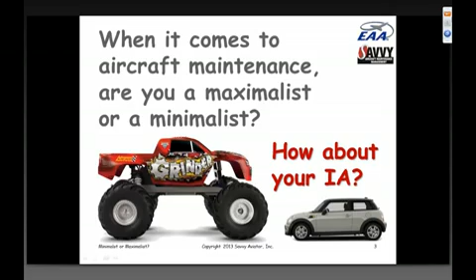It's important to decide which camp you're in, and it's even more important to figure out which camp your IA is in, because it will have a lot to do with how your aircraft is maintained.

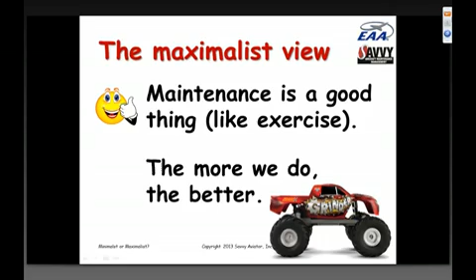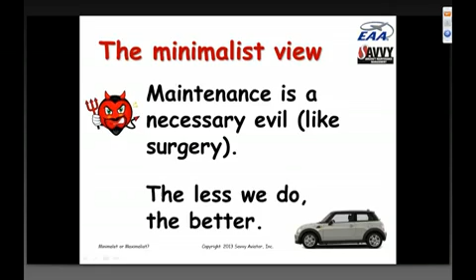To summarize these two competing philosophies very briefly: the maximalist view is that maintenance is a good thing, like exercise. The more of it we do, the better. The minimalist view is basically that maintenance is a necessary evil, like surgery. It's something we sometimes have to do, but the less of it we do, the better. And we should do it only when absolutely necessary, or when the benefits clearly outweigh the costs and risks.

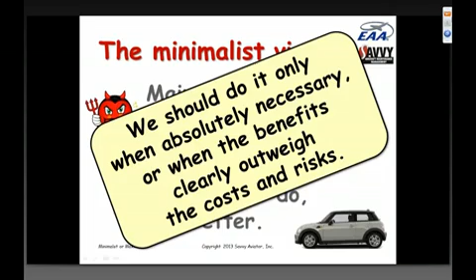And I fall into the minimalist camp. I'm an unabashed maintenance minimalist. Anybody who's read my Savvy Aviator column in Sport Aviation, or any of my articles and other publications, pretty well knows where I stand on this scale.

I believe strongly in doing only the maintenance necessary to make an aircraft safe, reliable, and compliant with regulations, and that doing any more maintenance than that is not only a waste of time and money, but it actually makes the aircraft less safe and less reliable.

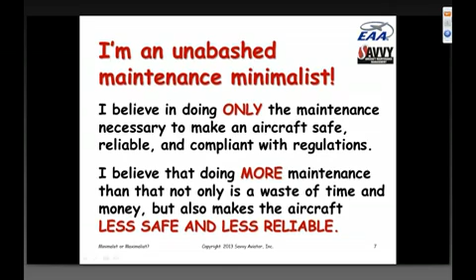And that's why I believe that maintenance is inherently a bad thing. It's something that we have to do, but we shouldn't be doing any more than absolutely necessary. And I'll illustrate that tonight with a whole bunch of war stories.

This less-is-more maintenance philosophy is one that served me very well for decades, originally as an aircraft owner, then later as a mechanic and a manager of maintenance for many, many hundreds of aircraft.

And it turns out that this minimalist philosophy has actually become an established science called reliability-centered maintenance. I've done webinars and articles on that subject. It is a philosophy that has been widely adopted throughout the aviation world by airlines, military, high-end biz jets, and actually has been adopted well beyond the aviation space in safety-critical industrial applications like nuclear power plants and offshore oil platforms and that sort of thing.

And pretty much the only part of aviation that still adheres to the maximalist philosophy is owner-flown general aviation. Owner-flown GA, as we'll talk about a little bit later, is something like 50 years behind the rest of aviation when it comes to how we maintain our aircraft.

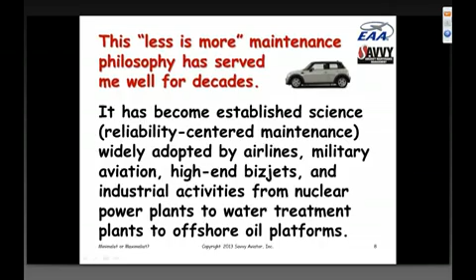And this minimalist philosophy, although it is universally adopted in other parts of aviation, is typically heresy to many general aviation mechanics, particularly the older ones, who were taught in A&P school that maintenance is a good thing and that more maintenance is a better thing.

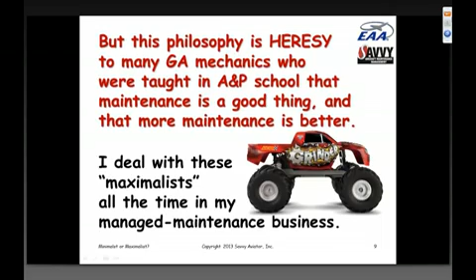And I have to deal with these maximalist mechanics and IAs all the time in my managed maintenance practice. And sometimes our debates get pretty interesting. I wanted to illustrate the perils of maximalism and why I believe in a minimalist philosophy by telling you a few stories about actual aircraft owners and some of the things they've gotten into.

Frank flies the heck out of this airplane. He literally commutes to work in it almost every day. He lives in Santa Barbara, and he is a marketing consultant that works with clients all over the United States, but a lot of his clients are up in Silicon Valley. So he's pretty well flown a groove from Santa Barbara up to the Bay Area and back, and he flies that trip a couple of times a week. He uses the airplane a great deal, and he absolutely depends on its reliability because effectively he uses it to commute to work.

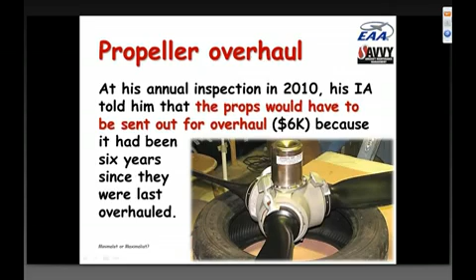Frank, up until very recently, used a very well-known twin Cessna specialty shop in Southern California, a shop that knows these airplanes very well. But the IA who runs that shop is an absolute maximalist, as we'll see. At his 2010 annual inspection, about 3 years ago, the IA told him that his props would have to be pulled off and sent out for overhaul.

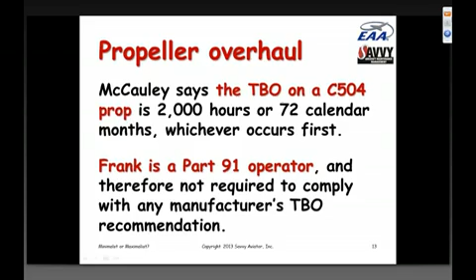At a cost of about $6,000, because it had been 6 years since they were last overhauled. These props are McCauley props, and McCauley says the TBO on these particular props, the C504s, is 2,000 hours or 72 calendar months, that's 6 years, whichever occurs first. But Frank is a Part 91 operator, like most of us, and he's not required to comply with any manufacturer's TBO recommendation. So this TBO from McCauley is really a mere suggestion for Frank, not a regulatory requirement.

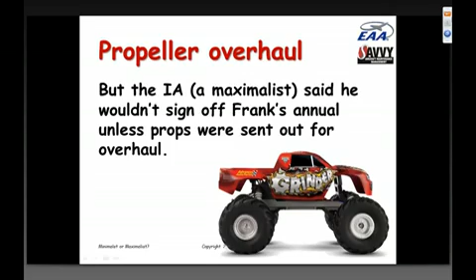Nevertheless, the IA, who is a maintenance maximalist, said he wouldn't sign off Frank's annual unless the props were sent out for overhaul. Frank consulted me, as he usually does. Sometimes he follows my advice, sometimes he doesn't, but he usually solicits it. So he asked me what I thought he ought to do.

I suggested to Frank that he not overhaul his props at 6 years because, first of all, the McCauley 6-year TBO, like all calendar time TBOs, is based on a worst case aircraft, typically an inactive aircraft parked outside in a high corrosion environment like South Florida. The 6-year TBO has been established because of concern about internal corrosion in the propeller hub. But Frank hangars his airplane, and he flies it several times a week. He is at much lower risk of corrosion because of those two things.

And there is no history of accidents caused by exceeding the 6-year limit. I read hundreds and hundreds of accident reports. I'm an information junkie, as probably most of you know. And frankly, I have never heard of a single accident caused by a high-time propeller coming apart in a piston aircraft engine. I have heard of accidents in turboprops, which have much more complicated propellers, but there's literally no history of accidents caused by not overhauling the props every 6 years. And in fact, I have similar props to Frank's, and mine haven't been overhauled in more than 20 years. So I practice what I preach.

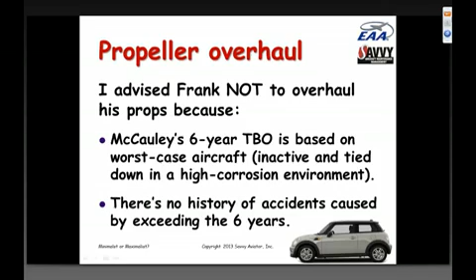In any case, I suggested to Frank that he go to his IA and try to make a deal with him. And he did. He asked the IA whether he would be willing to sign off the annual without removing the props if Frank promised that within 2 weeks after the annual was signed off, he would fly the airplane to a nearby propeller shop at San Luis Obispo Airport and have the propeller shop look at the props. If the prop shop said the props needed overhaul, he would overhaul them. If the prop shop said the props were okay to continue, then he wouldn't. The IA reluctantly agreed. Frank was a longtime customer, and against his better judgment, signed off the annual without doing the prop overhaul.

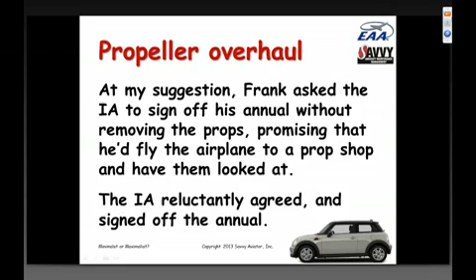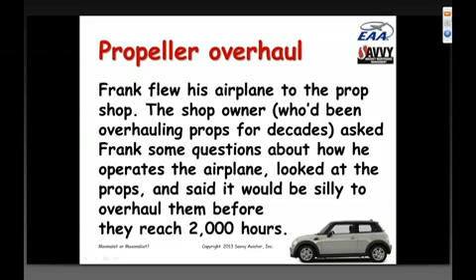Frank proceeded to fly his airplane to the prop shop. It's run by a shop owner who I have known for years and is a maintenance minimalist like me, and you don't find a lot of prop shop people who are minimalists. But this guy is very experienced, he's been overhauling props for decades. He looked at the props, asked Frank some questions about how he operated and stored the airplane, and concluded the exact same thing that I concluded: that it would be silly to overhaul the props before they reach 2,000 hours. So Frank didn't overhaul the props.

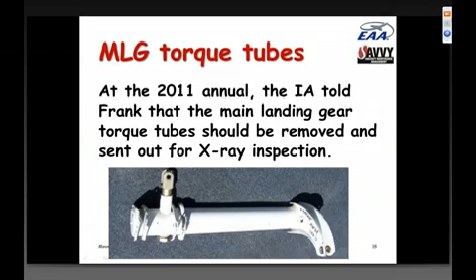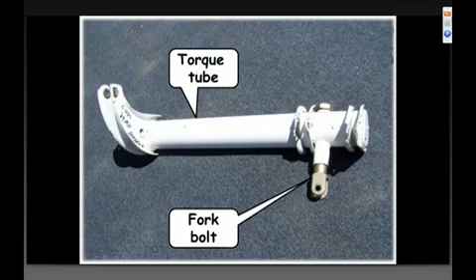Another thing that came up the next year, at the 2011 annual at this same Twin Cessna specialty shop in Southern California, is that the IA told Frank the main landing gear torque tubes should be removed and sent out for X-ray inspection. The torque tubes are part of the landing gear retraction mechanism in Twin Cessnas like Frank's. This is what they look like: a big steel welded complicated component with something called a fork bolt at one end, that operates the landing gear retraction system.

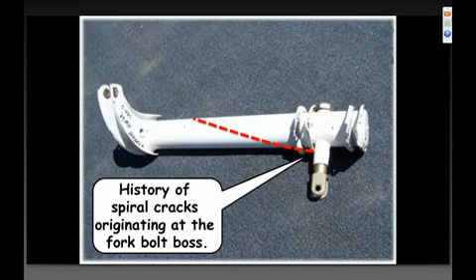These torque tubes have a history of developing cracks. The crack is a spiral crack. It always initiates at the fork bolt boss and progresses in a spiral fashion around the torque tube until eventually the torque tube fails, and during gear retraction it splits open, pretty much like a Pillsbury muffin can.

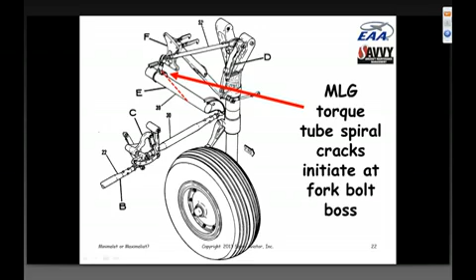There are lots of SDRs about these torque tubes cracking, and the IA was very insistent that these torque tubes be pulled off and sent out for X-ray inspection.

Frank consulted me. I advised him not to allow the IA to remove the torque tubes for X-ray testing because, first of all, in my experience, virtually no torque tube that goes out for X-ray testing ever passes the test. The vast majority of them flunk. So the act of removing the torque tubes and sending them out for testing is pretty much a guarantee that they'll be condemned. They're very expensive to replace.

I think they're $2,500 a piece, and there are 2 of them on the airplane. Most importantly, they always fail the same way, and the failure is a benign failure.

The way the torque tubes fail is that you retract the gear, the torque tube splits open like a Pillsbury muffin can. That particular landing gear remains down and locked. The pilot sees that one of his green lights hasn't gone out and that the red light doesn't go off. He puts the gear back down and lands.

To the best of my knowledge, there has never been a case of a gear collapse or any collateral damage caused by torque tube failure. When the torque tube fails, that particular main landing gear simply fails to retract.

No big deal. So my recommendation is to not go through this testing, which almost always results in having to buy new torque tubes, and do what literally every other Twin Cessna shop in the world does, which is simply to inspect the torque tubes visually for cracking, and not remove them from the airplane and not send them out for non-destructive testing.

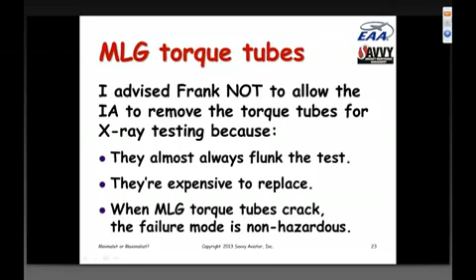Now, if the torque tube failure mode resulted in gear collapses or other damage or accidents or injuries or something like that, obviously I would feel very differently. But the point is that this is a failure whose consequences are benign, and in my view, there's no reason to be spending tons of money on non-destructive testing and replacing torque tubes.

Well, in any case, Frank listened to my arguments and decided to follow the IA's advice instead of my advice. So he had his 2 torque tubes removed and sent out for X-ray analysis. One of them came back red tagged by the shop. The other came back green tagged by the shop.

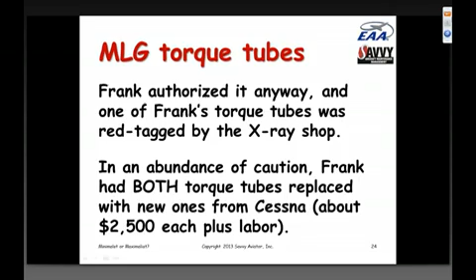In an abundance of caution, Frank decided to replace both of his torque tubes with new ones from Cessna, paid about $2,500 each for the new torque tubes, and, I don't know, 4 or 5 hours of labor for the removal and reinstallation and so on.

At the next annual, the 2012 annual, the IA discovered that these new torque tubes had been improperly manufactured by Cessna and had been rubbing against the wing ribs in the wing during gear retraction and damaging them.

Cessna fessed up to their error and supplied 2 additional torque tubes. So now Frank is on his 3rd set of torque tubes. Cessna provided the replacement torque tubes free in this case, but Frank once again paid for the labor for removal and reinstallation.

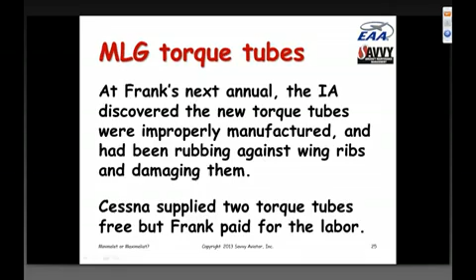Then at the 2012 annual, we had an interesting situation come up having to do with an airworthiness directive against the exhaust system of these airplanes. In the 1990s, and there's some history behind this, I was quite heavily involved in the development of this AD.

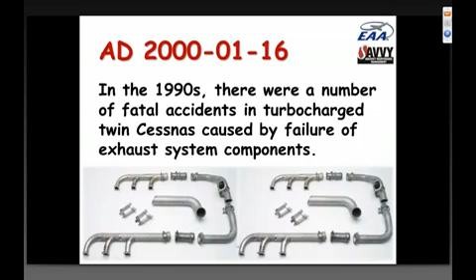In the 1990s, there were a number of fatal accidents in turbocharged twin Cessnas, like Frank's and mine, caused by the failure of exhaust system components. As a result of those accidents, the FAA issued an airworthiness directive, which I helped write, in January 2000, requiring, among other things, that exhaust systems with more than 2,500 hours time in service be replaced, overhauled, or recertified at the next engine overhaul.

I did miss one item here: during the development of the AD, we literally researched every single twin Cessna exhaust accident. What they had in common was that they were high-time exhaust systems with more than 5,000 hours on them, and many of them had been weld repaired in an incompetent fashion.

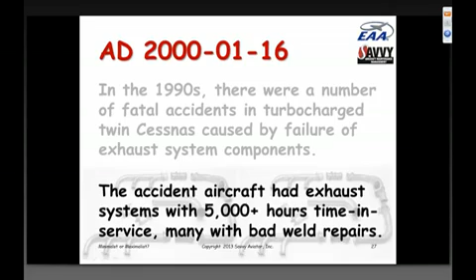The combination of high time and, in many cases, improper weld repairs were causing these exhaust systems to fail and causing accidents. So the FAA issued AD 2000-01-16 that called for exhaust systems with more than 2,500 hours on them to be replaced, overhauled, or recertified at the next time the engine was overhauled.

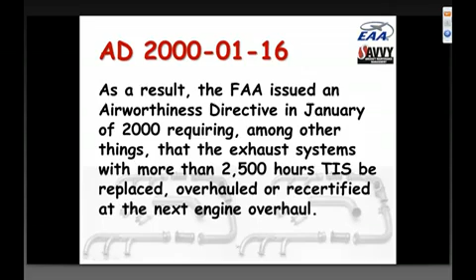The reason the AD was written that way was because the FAA was convinced by people like me that taking the exhaust system apart and putting it back together entailed a great deal of risk that it wouldn't go back together correctly, and that inspection should only be done when the exhaust system had to be removed anyway, which typically occurs when the engine is removed. So that's how the AD was written.

Here are the exact words in the AD having to do with the removal and recertification of the exhaust system. It provided an initial compliance time: at the next engine overhaul that occurs after the accumulation of 2,500 hours time in service since installing a new or overhauled exhaust system.

If the exhaust system did get recertified, which is very unlikely because a high time exhaust system probably wouldn't pass the test, just like the torque tubes—but in the event it passed recertification and went back on the airplane, which almost never happens, there was a repetitive compliance time saying it would have to be removed and recertified at intervals not to exceed 2,500 hours or 12 years, whichever comes first.

Note that the initial compliance time doesn't have a calendar time component, but the repetitive compliance time does have a calendar time component.

Well, Frank, being the very cautious guy that he is, when this AD was first issued back in 2000, decided in an abundance of caution to replace his exhaust system right then with new ones. It wasn't required by the AD, but Frank was aware of all the exhaust-related accidents in twin Cessnas caused by AD problems, and decided he'd sleep better at night if he replaced his exhaust system. So he put a brand new exhaust system on both engines in 2000.

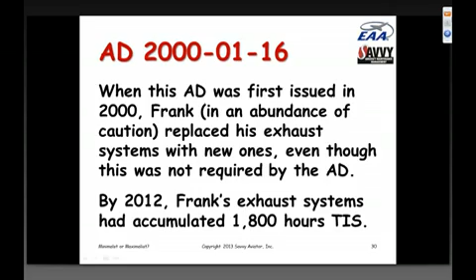By 2012, by the time he got to the annual, his exhaust system had accumulated 1,800 hours time in service, so it was still relatively young. But at that annual, the IA at this shop told Frank that the exhaust systems would have to be removed because they were now 12 years old.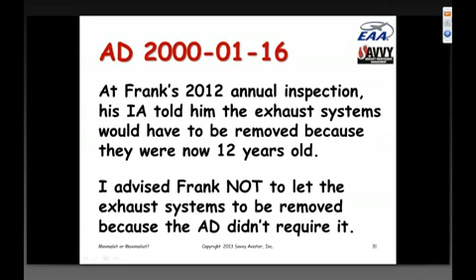Frank called me. I advised Frank not to let the exhaust system be removed because the AD didn't require it. He hadn't reached 2,500 hours, and even if he had, the AD didn't require the exhaust system to be removed until the engine was removed. I had Frank pull up the AD and read the wording for himself. He concluded that my interpretation of the AD was right and the IA's was wrong.

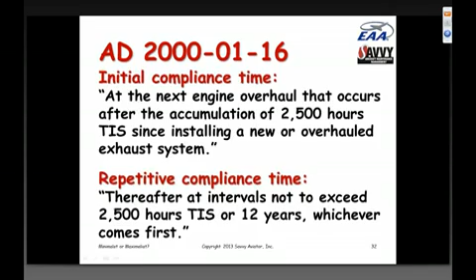But the IA insisted he was right and went ahead and removed Frank's exhaust system anyway. Frank got upset and decided to escalate the matter. He called the owner of the shop, who decided to call the Wichita Aircraft Certification Office of the FAA.

The Wichita ACO was the office responsible for this AD. They took it under advisement, and two days later came back and said they agreed with my interpretation, not the IA's, and that the removal was not required.

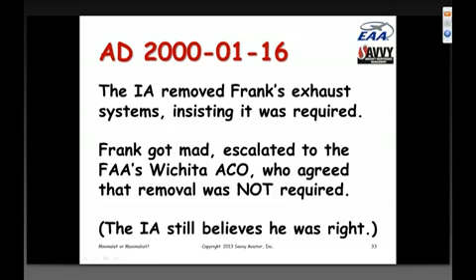The IA still believes he was right. He's still removing exhaust systems at 12 years, but the FAA itself said it wasn't required. Frank wound up getting his money back, getting the shop to refund the money they'd spent removing his exhaust system unnecessarily.

By now, Frank has learned his lesson, and he's stopped using that shop. He's now using a different shop in Southern California that has a much more reasonable maintenance philosophy, at least in my view.

I did a webinar that I'll just summarize very quickly about a disastrous Cirrus SR22 annual that we wound up bailing the owner out of trouble on.

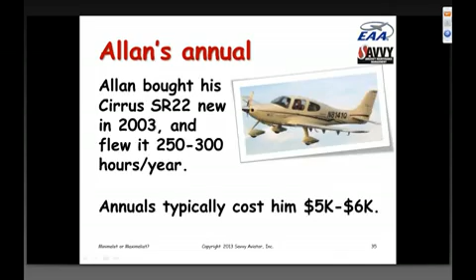He had bought his airplane new in 2003. This was another fellow who flew the airplane a lot. He used it to commute to work. He typically spent about $5,000 or $6,000 for his annual inspections. But in 2010, he decided to use a different service center, one he'd never used before, and that turned out to be a big mistake.

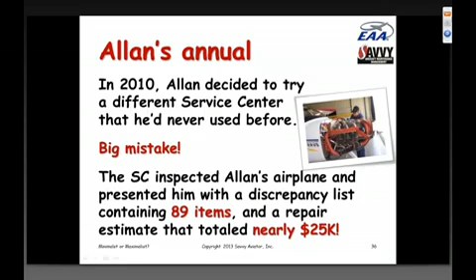That service center, who was obviously a maximalist service center, inspected Allan's airplane and presented him with a discrepancy list containing 89 items and a repair estimate that totaled nearly $25,000. Allan freaked out and called me. He was actually in India at the time on a business trip when he got this $25,000 estimate.

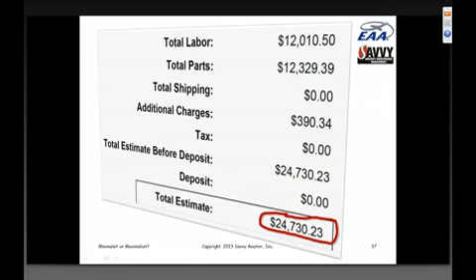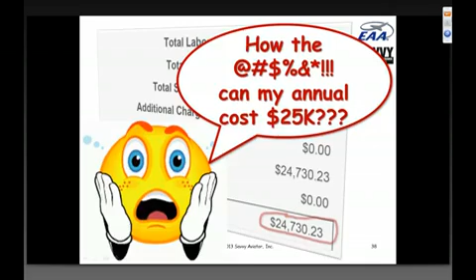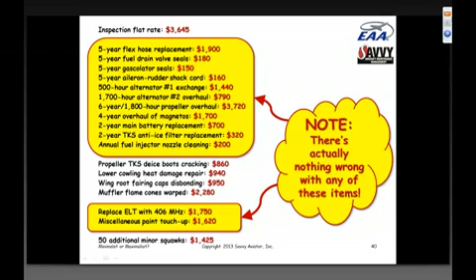Almost all of them are time-directed items — replacing hoses at 5 years, drain seals at 5 years, alternators at 500 hours, and that sort of stuff. That's really where most of the money was in this big estimate — replacing things. A 6-year propeller overhaul, a 4-year overhaul of magnetos, a 2-year battery replacement, so on and so forth. All things where we're replacing an item that is working just fine. There's no inspection finding that the item has a problem. It's simply that it reached some particular age, in calendar time or hours, and the manufacturer recommended replacing or overhauling it at that point.

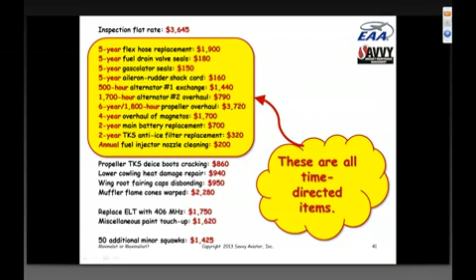We almost always recommend saying no to this sort of thing, and that's indeed what we did in this case. We went through this whole discrepancy list with a fine-tooth comb and recommended declining a whole bunch of items that we felt weren't required and weren't going to add any safety or reliability to the airplane. They were just checking off items on a checklist. We wound up reducing this invoice from almost $25,000 to about $8,000, which is still more than Alan was used to paying at an annual.

That was just a penalty for picking this particular shop, but it was about $17,000 less than the original estimate, because there was just a whole lot of stuff on there to say no to. It got a little testy for a while between us and the IA, but ultimately he came around, and we got this thing cut down to something reasonable.

Finally, I'd like to talk a little bit about top overhauls. Top overhauls are a pet peeve of mine. They're very, very common in my experience. They're almost never warranted, and we always recommend to our clients against doing top overhauls. The reason is simple: it never happens that you put an airplane in for an annual inspection and all of the cylinders on the engine are unairworthy. That just doesn't ever happen.

Typically what happens is you put your airplane in for an annual and 1, maybe 2 cylinders are unairworthy for some reason — they got a burned exhaust valve, the compression is below minimum and can't be brought up by the various methods we try to use to bring compressions back up. But it's never the case that all the cylinders are bad at the same time. It's just amazing how often mechanics recommend replacing all the cylinders just because 1 or maybe 2 have a problem. We always recommend against doing that, not only because it's wasteful to replace a cylinder that's still airworthy, but because it's very risky to do.

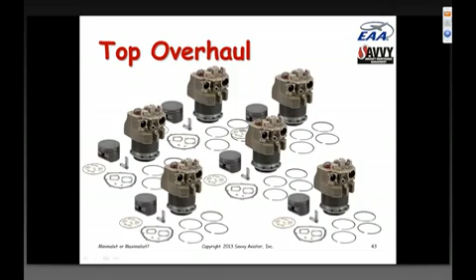The top overhaul is one of the riskiest maintenance operations you can do on an aircraft. Unfortunately, I've had the misfortune of serving as an expert witness on at least half a dozen lawsuits that arose out of air crashes caused by improperly executed top overhauls. So we always recommend against it because it's uncalled for, it's expensive, but most importantly, it might get you hurt.

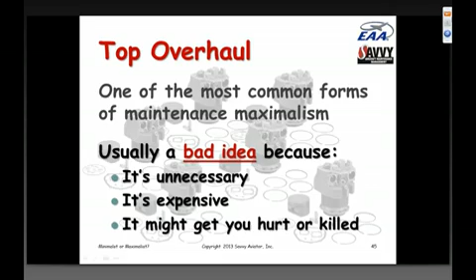I'll show you just a few pictures of some of the top overhaul lawsuits and accidents that I've gotten involved with one way or another over the last few years.

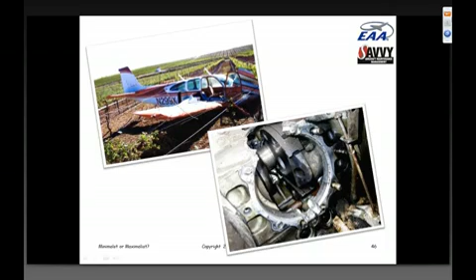A great deal of forensic work was done, as is typically the case with accidents like that which result in lawsuits. It turned out that a cylinder came off in flight because the mechanic who installed it used a small dab of sealant called TCM gasket maker. This is a very good sealant to use on lots of things, but no kind of sealant is allowed when installing a cylinder. Even a tiny bit of sealant on the cylinder base O-ring, where he applied it, will extrude onto the base flange, cause the hold down studs to lose their preload, and the studs will shear, causing the cylinder to come off. That's what brought this airplane down - just a tiny dab of sealant applied in the wrong place.

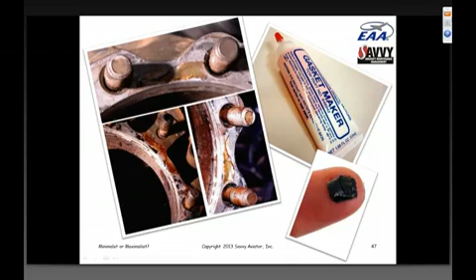It's a really big lawsuit. I think it was a $12 million lawsuit or something.

Here's another one I was involved in as an expert witness for Continental Motors. This was another very tragic accident involving an A36 Bonanza that took off out of Santa Monica with a doctor and his wife. It had a catastrophic engine failure not long after takeoff due to a thrown rod. The pilot attempted to turn back and land on the beach. He didn't make it, but he made an extremely good ditching, and when the aircraft was dragged up onto the beach, you can see the airframe was still in very good condition. Unfortunately, the pilot had not installed shoulder harnesses in the A36, and both he and his wife hit their heads during the ditching and were apparently knocked unconscious.

The airplane sank and they drowned. If they had shoulder harnesses, this accident would have been eminently survivable, but unfortunately they didn't.

When we looked at the history of this aircraft, the engine had undergone a top overhaul just a few hours before it came apart. The mechanic who did the top overhaul - let me just be charitable and say he had no business working on a piston engine. All his experience was with turbine stuff, and he screwed up the top overhaul. A bearing spun, and the number 2 connecting rod sheared and was thrown through the side of the case, and the engine came apart.

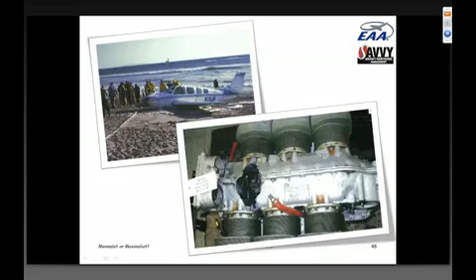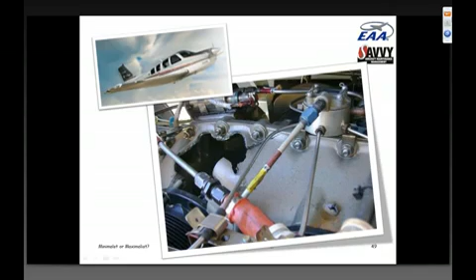Here's another similar one with a much happier ending. It was a B-36TC Bonanza belonging to a doctor on the East Coast, who had the engine throw a rod less than 10 hours after 3 cylinders - all the cylinders on one side of the engine - had been replaced improperly. He made a forced landing where he didn't bend any metal and didn't get hurt, but the engine came apart, and he was in a very mountainous area at the time. It was only his cool thinking and skill that prevented this from turning into a major tragedy.

Here's one of our own Cirrus clients that went in for an annual. The shop replaced 2 cylinders, which actually had to be replaced - they had burned exhaust valves - but apparently the mechanic got distracted and failed to torque down the screws holding the rocker covers on. So 10 or 15 hours later, on a dark, moonless night at 14,000 feet over the Florida Panhandle, this engine cratered. Our intrepid aviator, an aircraft owner and doctor, made a beautiful dead stick landing on a little airstrip in Marianna, Florida.

If you look at the pictures that were taken right after the accident, you can see that the left rocker cover is completely gone. There's no sign of either the rocker cover or the 5 hold-down screws. The right rocker cover is hanging by a single top screw, and the other 4 screws are missing.

So clearly the mechanic neglected to torque these screws down. Maybe he put them in finger tight, and then the Snap-on truck came by, or the phone rang or something. He got distracted. Kind of stuff happens all the time. And the rocker covers came off. The engine threw all of its oil overboard, and it wound up throwing a rod and cratering the engine.

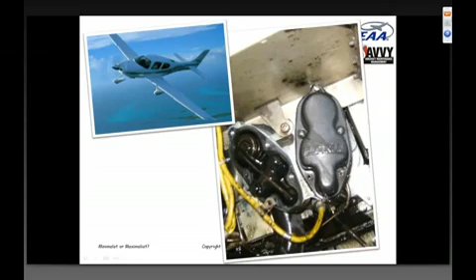I've just been involved in too many of these things, and so I'm very, very squeamish about multiple cylinder replacement at once, and particularly top overhauls. I always try to discourage my clients from doing top overhauls because of the risk and because there's really no compelling reason to do it.

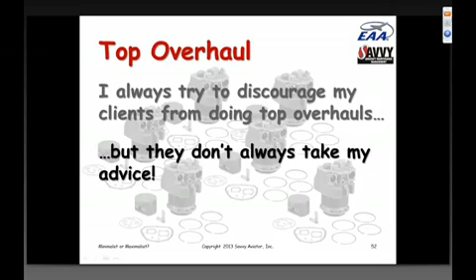But they don't always take my advice. And I'll be telling you a brief story later about a client, something that just came up in the last 2 weeks that I'll tell you about.

But in any case, I am an unabashed maintenance minimalist. I don't believe that more maintenance is better maintenance. Usually it's worse. My philosophy in maintaining my own airplane and in maintaining my clients' airplanes is to perform only the maintenance that clearly is either required by regulation or clearly contributes to making the aircraft safe or reliable. If it doesn't meet that test, we don't want to do it.

This is a lesson we learned many years ago. I wrote an article for EAA Sport Aviation a couple of years ago called The Waddington Effect, about a British scientist, Conrad Waddington.

C.H. Waddington, who got drafted into the Air Force during World War II. He's British, and he was assigned during the war to something called the Operations Research Section of the Royal Air Force Coastal Command, where they did research for the Air Force on all sorts of interesting projects. But the most interesting project, at least to me, that he was involved in had to do with trying to figure out how to improve the maintenance on the B-24 Liberator bomber fleet that the RAF Coastal Command was using to drop depth charges on German submarines.

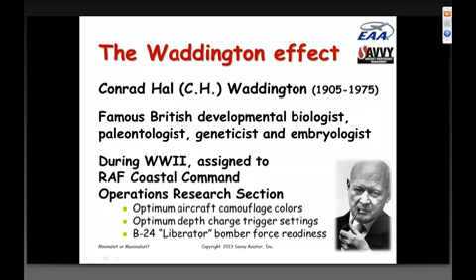And he discovered, as part of his research, an interesting phenomenon that became known as the Waddington Effect, where he plotted the number of unscheduled repairs, in other words, squawks, that came up on these airplanes as a function of how many hours it had been since they were in the shop last. At the time, these airplanes went into the shop every 50 hours for not only an oil change, but a whole bunch of other preventive maintenance.

What Waddington discovered in his research was that the more hours since the airplane had last been in the shop, the less frequently it broke. At no time did the rate of squawks start to increase until it was time to go back in the shop for the next preventive maintenance cycle. The number of squawks continually decreased over time until the airplane went back into the shop for its next 50 hour.

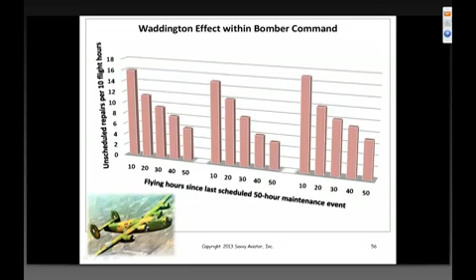His conclusion, which is pretty obvious when you look at the data this way, is that scheduled maintenance tends to increase breakdowns. This can only be because it's doing positive harm by disturbing a relatively satisfactory state of affairs. He pointed out that there was no sign that the rate of breakdown was starting to go back up after the 50 flying hours when the airplane went back into the shop for its next scheduled maintenance cycle.

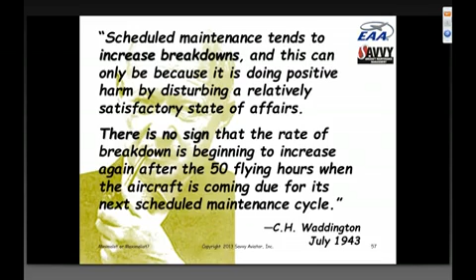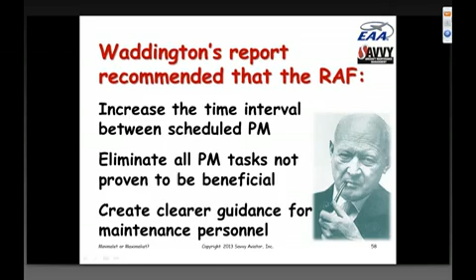As a result of this research, the Waddington's group recommended and the RAF adopted a new maintenance policy, which increased the time between scheduled preventive maintenance and eliminated a great number of the maintenance tasks that they had been doing, and only did those maintenance tasks that were absolutely proven to be beneficial. As a result of these changes, the number of effective flying hours, what we would call today force readiness of this B-24 fleet, increased by more than 60%. So the less maintenance they did on these airplanes, the more reliable they were.

This very same discovery, and all of the work that Waddington did was classified and didn't get unclassified until 1975.

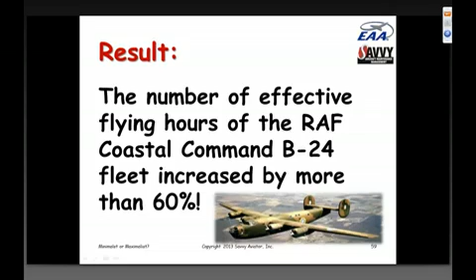But the airlines rediscovered this same thing in the 60s, that the less preventive maintenance they did, the more reliable the airplanes were and the less downtime they had. And they started drastically cutting back on maintenance.

The reason for this is simply that maintenance is, as I said, like surgery. It's inherently invasive, and anytime you do it, there's a chance a mechanic's going to screw something up. The more invasive the work, the more likely there's going to be a maintenance-induced failure, or mechanic-induced failure, if you like. There is nothing you can do to an airplane that's more invasive than doing a top overhaul.

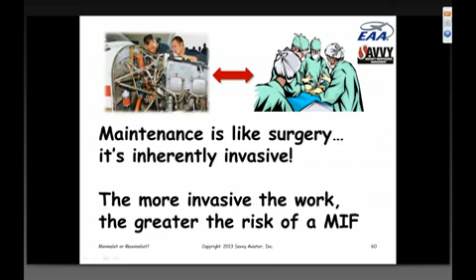As I said, this minimalist philosophy, which became known as reliability-centered maintenance, was adopted by all of the air carriers in the 1970s. There's a standard for reliability-centered maintenance that is maintained by the Air Transport Association. It's called the Maintenance Steering Group Number 3 Report, or MSG3 for short.

In the 80s, the philosophy was adopted by the military. In the 90s, it was adopted by all sorts of non-aviation industries that had similar maintenance-intensive, safety-critical kinds of activities.

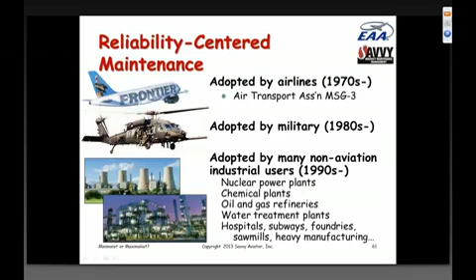So this is sort of the timeline of how maintenance philosophy has evolved until most of aviation is now doing things in this reliability-centered, minimalist way, where the focus is not on doing scheduled overhauls and life-limiting things to TBO and so on, and doing things on fixed timetables.

The emphasis is on doing very good condition monitoring and finding incipient failures before they become actual failures. So we emphasize inspection rather than time-directed tasks. And also a big part of RCM is doing what's called failure effects analysis, which is analyzing the consequences of the failure and not trying to prevent failures that have benign consequences.

That's the kind of thing we were talking about with Frank's torque tubes. Why get all hot and bothered about torque tube cracks when the crack typically can be found by simple visual inspection? But if the worst comes to the worst and the torque tube cracks, it's no big deal. The landing gear just doesn't retract. You put the gear down, you land the airplane, and you go fix it.

It's not a big deal. It's not going to hurt anybody. It's not going to cause collateral damage. So why get all hot and bothered about these cracks? Cracks in an exhaust system are very serious. Cracks in a landing gear torque tube are not serious. We have to be thinking about not only the failures, but what the consequences of the failures are.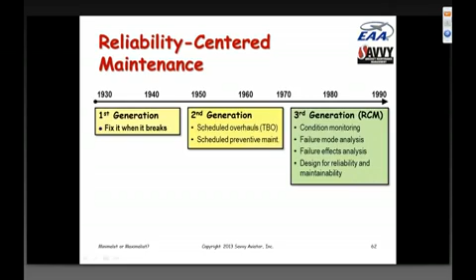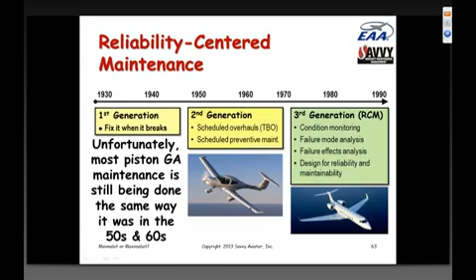And we should be focusing our maintenance dollars on trying to prevent failures that have serious consequences, and not trying to prevent failures whose consequences are acceptable. Unfortunately, most piston GA maintenance today is still being done using the second generation approach that dates back to the 50s. We're way behind the rest of aviation, and as a result, aircraft owners tend to do way too much maintenance, spend way too much money on maintenance, and incur way too many maintenance-induced failures that wouldn't happen if a more minimalist philosophy was used.

So let me wrap this thing up with one more war story, and this is one that just came up in the last couple of weeks. It involves a client of mine who has a 2002 Cirrus SR22. My company manages about 10% of the Cirrus aircraft in the U.S., so we have a lot of Cirrus war stories to talk about.

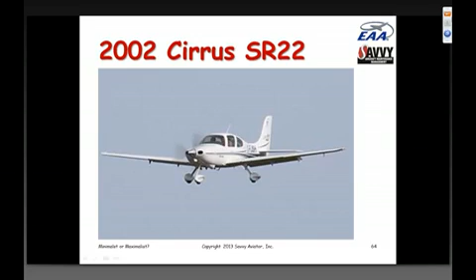The short version of the story is the owner decided he was going to sell this aircraft. He actually was buying a twin Cessna, and he wanted to sell his Cirrus SR22. So he listed the airplane with a broker, and then while the airplane was listed for sale, for some reason he had a compression test done. I'm not sure why he had the compression test done, because it wasn't time for his annual inspection.

But he had a shop do a compression test during an oil change or something, and one cylinder had compression below the master orifice threshold that Continental specifies as their airworthiness limit. The other 5 cylinders had mediocre compression, but they were all airworthy readings. I think one was in the high 40s and the others were in the 50s and 60s. But one cylinder tested low.

We recommended to the owner that he replace that one cylinder, but the owner decided to have a top overhaul done and replace all 6 cylinders. So he pulled all 6 cylinders and sent them to a very good cylinder shop that we recommended. The shop inspected the cylinders and advised the owner that none were repairable because they all had too many head cracks to overhaul. It just wasn't economical to repair them.

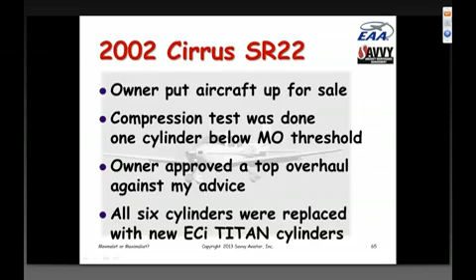So his 6 cylinders were retired. He wound up buying 6 brand new ECI Titan cylinders, put them on the engine, and shortly thereafter started complaining about an oil leak. He had the airplane in a couple of different shops looking for the source, and eventually, about 30 hours after the top overhaul, the source of the oil leak was found.

It turned out to be a crankcase crack at the aft side of the number 2 cylinder, at the 7th stud hole down, right between the number 2 cylinder and the oil cooler. So now he has a cracked crankcase. The engine is now trash and unairworthy, with 6 brand new cylinders on it with less than 30 hours on them.

So now the owner found himself facing replacing the engine with a factory rebuilt engine, 30 hours after spending something like $15,000 doing this top overhaul that we recommended he not do. He was not a very happy camper, obviously.

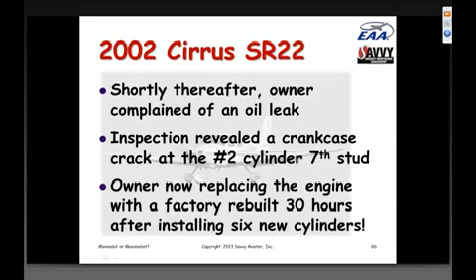We contacted Continental Motors on his behalf and negotiated a really good deal for him. First, Continental would give him full core credit for his engine even though it had a cracked crankcase, and second, they would let him keep his 6 ECI cylinders and pistons that were only 30 hours old, which he'll probably be able to sell on eBay for $4 grand or so.

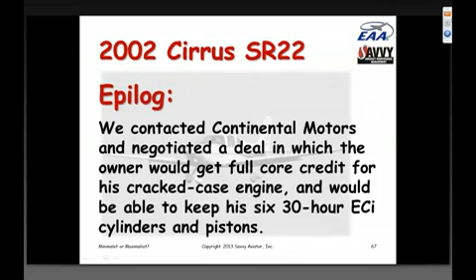So we got an exceptionally good deal for him out of Continental, but he would have been a whole lot happier had he not decided to replace the cylinders, and we urged him not to do that, but he did it anyway. At any rate, that's that.

This is some of these stories that will help you understand why I have come to the maintenance minimalist philosophy that I have, which believes in doing only that maintenance that is either specifically required by regulation or that clearly will make the aircraft more safe and reliable. And if maintenance doesn't meet that standard, I recommend declining it. In short, if it ain't broke, don't let them fix it.